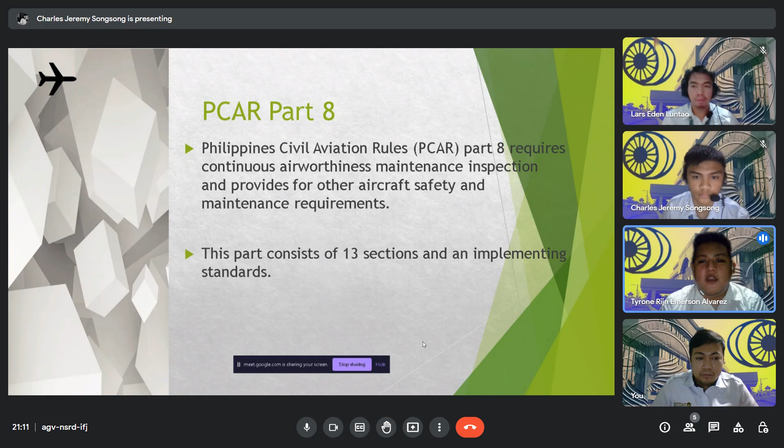PCAR Part 8 of the Philippine Civil Aviation Rules requires continuous airworthiness, maintenance, inspection, and provides for other aircraft safety. The registered owner or operator of an aircraft is responsible for maintaining the aircraft in an airworthy condition, including compliance with all airworthiness directives. No person may perform maintenance, preventive maintenance, or alteration on an aircraft other than in compliance with PCAR. Air carriers must use a continuous airworthiness maintenance inspection program for the inspection of the aircraft.

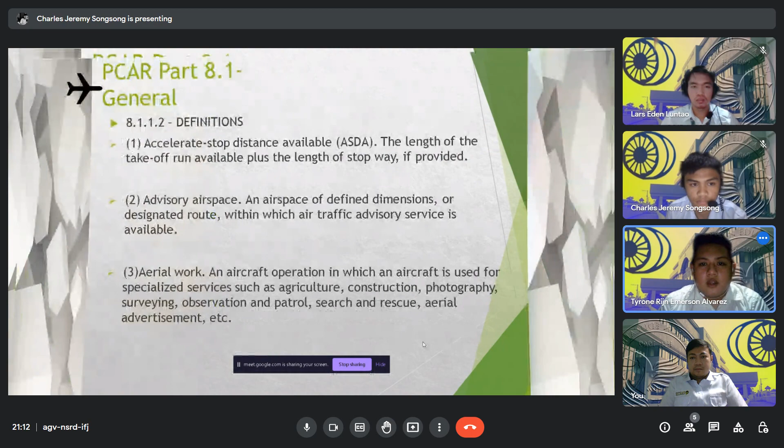PCAR Part 8, Section 2: Aircraft requirements and registration markings. No one is allowed to operate a civil aircraft with the Philippine registration number unless the nationality and registration markings are displayed in line with the section's requirements.

The letter or letters used to indicate the Republic of the Philippines nationality must meet the specifications. The authority will then allocate the sequence of numbers or letters to accompany this. No one is allowed to modify or confuse the nationality and registration marks on any aircraft unless the authority specifically permits it. The international five-letter signals or distress codes should not be confused with the markings.

Special Airworthiness Certification, Operation and Restriction. A restricted category special airworthiness certificate is issued to operate aircraft that have been type certificated in the restricted category. Operation of restricted category aircraft is limited to special purposes.

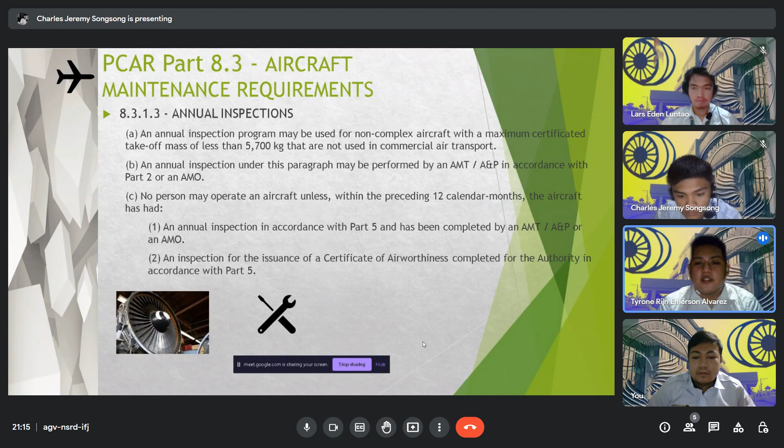Did it pass the inspection or not? If it did not pass, a discrepancy list must be provided to the owner, and the inspection categorized as unworthy in the aircraft records. Next is the annual or 100 hours inspection.

This essential inspection is typically done, as its name suggests, after every 100 hours of flight time. However, the time can vary by the aircraft's make and model. The aircraft inspection is performed to make sure that the aircraft is airworthy for the next 100 hours of flight. The inspection itself includes a thorough examination of the entire aircraft, from top to bottom, including its engine, propellers, fuel system, hydraulic system, and interior and exterior.

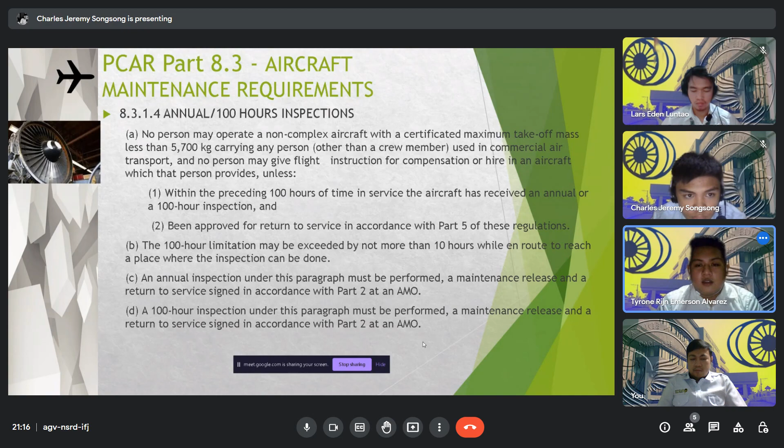The next section is about composition of the flight crew. The minimum flight crew is two pilots, at least one of whom must be a captain. In addition, a safety pilot or a co-pilot fully qualified to operate in the right seat must be carried for base training and flying under supervision until positive release.

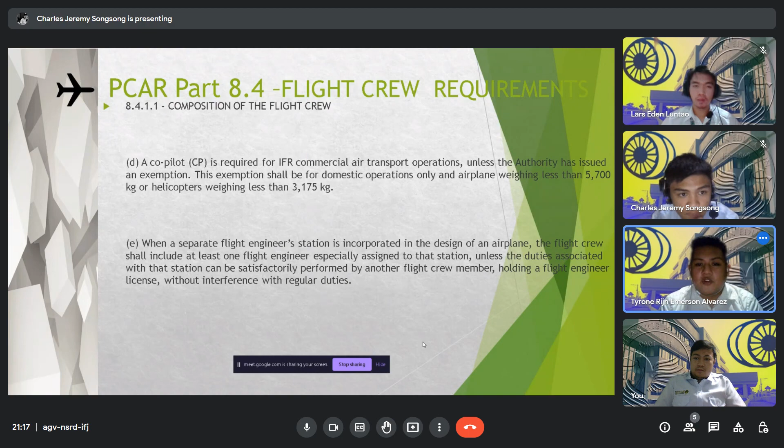Next is flight crew qualification. Airlines shall use a fully qualified flight crew consisting of at least a pilot in command and a second in command. For all flights of an aircraft during a flight period, each flight crew member shall be appropriately licensed and rated by the CAAP to operate the aircraft.

The next is the authority and responsibility of the PIC, or the pilot in command. PIC is the person aboard the aircraft who is responsible for its operation and safety throughout the flight. This will be the captain in a typical two or three pilot aircrew.

If there is just one certified and qualified pilot at the controls of the aircraft, the PIC must be legally certified to control the aircraft for the specific flight and flight condition. However, he doesn't really have to be manipulating the controls at any given moment.

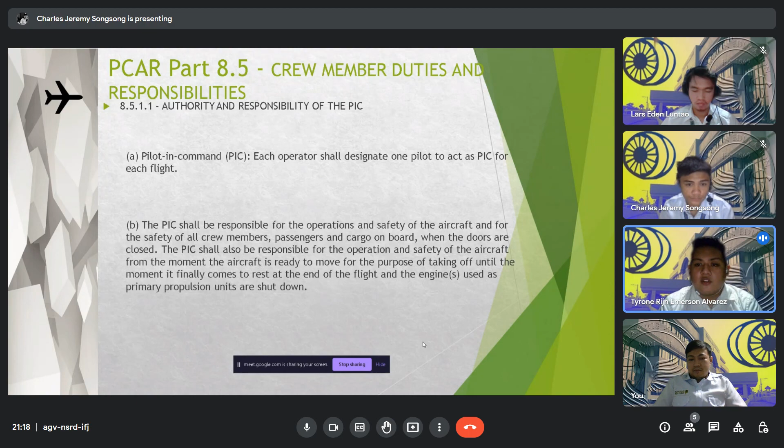The pilot in command is the person legally in charge of the aircraft and its flight safety operation. Also, he is the first person liable to question for any breach of flight rule. The strict legal definition of PIC might vary slightly from country to country.

The next section is about submission of a flight plan.

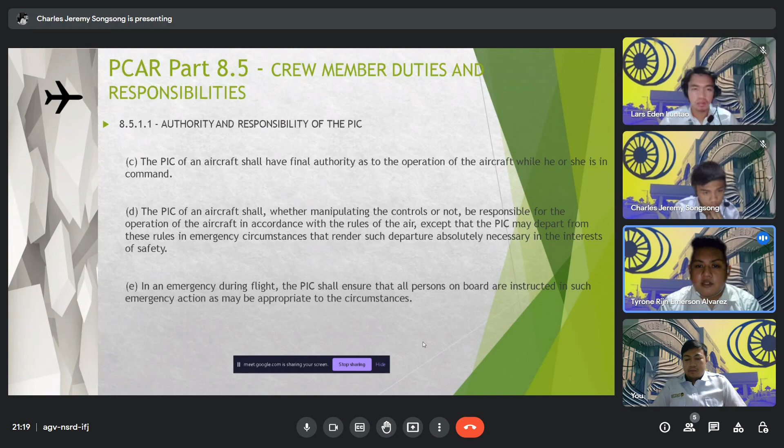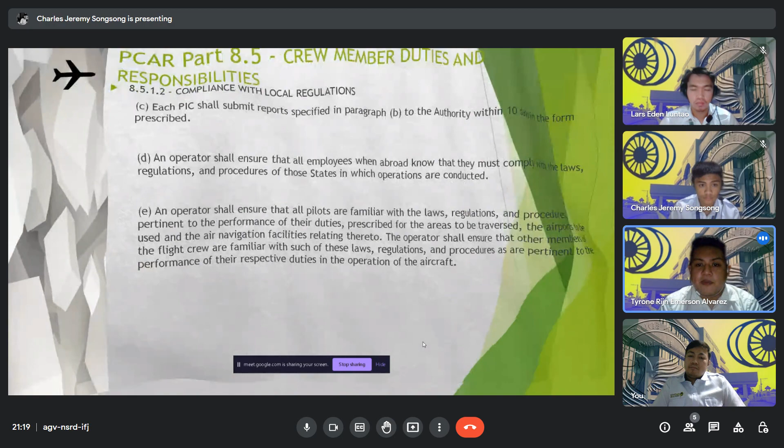A flight plan is a standardized form that pilots fill out and submit to the FAA prior to departure. It is the written culmination of a thorough flight planning process. Filing a flight plan shares important information on your intentions for the flight, including your destination, route, amount of time you expect the flight to take, fuel on board, number of passengers, planned cruising altitude, and more. An ATC flight plan is a document which provides specified information to an air traffic service unit relative to an intended flight or portion of the flight of an aircraft.

The next section will be discussed further by Lars Eden Luntao.

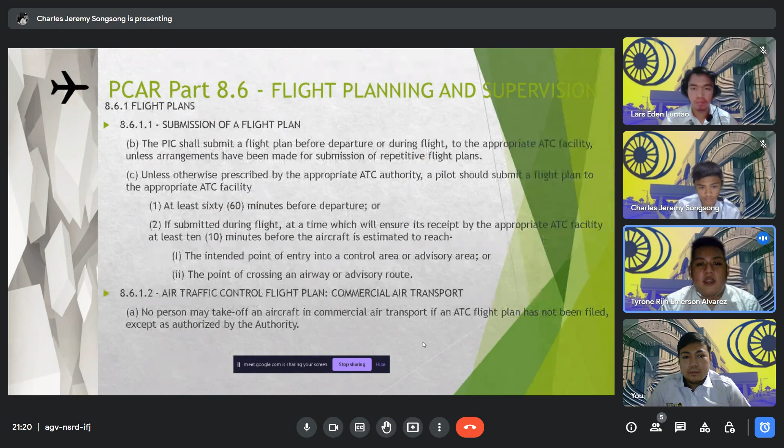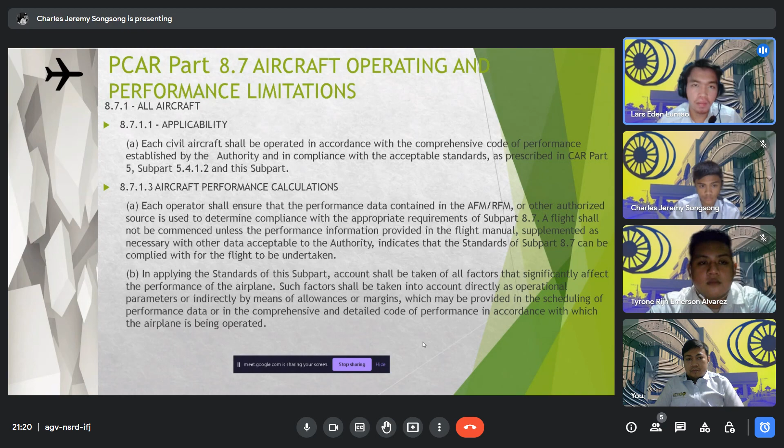Thank you. Now for PCAR Part 8, Section 7, it tackles the aircraft operating and performance limitations. In layman's terms, this states the required altitude, weight, angle of attack, route, or diversion route in case of air traffic issues. It also states that any aircraft you operate must follow the designated route, altitude depending on air traffic control instructions, and the correct weight before it can fly.

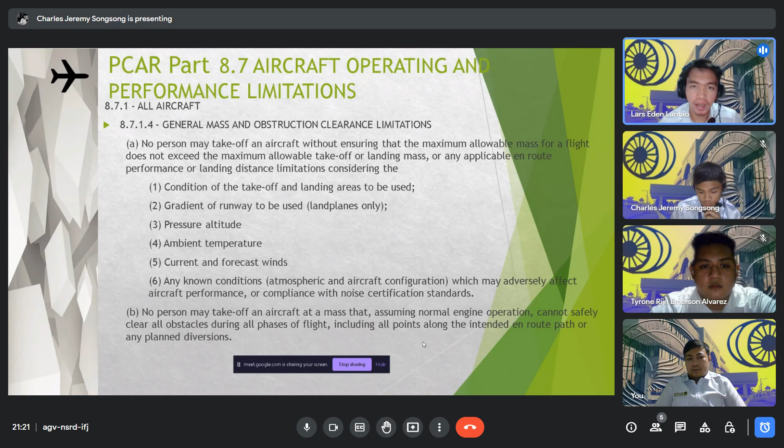Now there are six remaining sections in PCAR Part 8, but we only have limited slides to offer. I will give a brief explanation pertaining to the remaining six sections of PCAR Part 8.

PCAR Part 8, Section 8 is similar to Section 7. Here, the rules for ground operations, flight altitudes, and rates of descent and ascent of an aircraft are more detailed. It also includes prohibited areas, flight test areas, operations in Minimum Navigation Performance Specifications (MNPS), or Reduced Vertical Separation Minimum (RVSM) airspace.

Beforehand, we asked our classmates what questions bothered them most when it comes to aviation. One question that stood out was: what happens when the airport you're flying to suddenly has a national emergency and restricts takeoffs and landings, or when there's severe wind or a storm?

There are no specific answers to that question, but according to PCAR Part 8, Section 8, the aircraft may only land on its destination runway once the storm or wind has subsided, or with permission from the authority. The ATC or aviation authorities will redirect the destined airport to the nearest and safest airport runway available. This also includes the redirection of routes to follow.